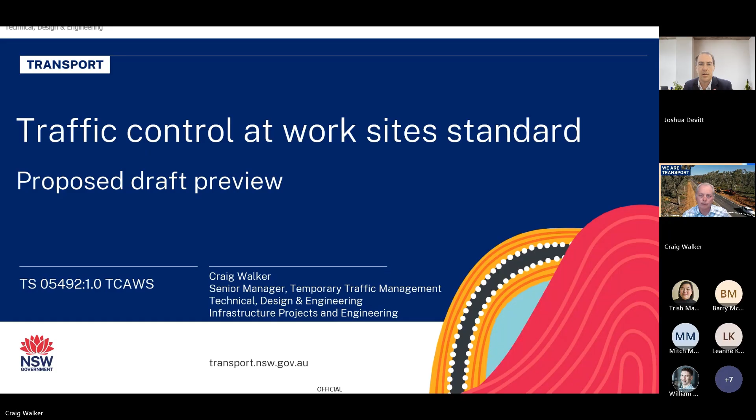We've got quite a good turnout today, which is fantastic to see, particularly given we've got such an important topic to discuss. For those who don't know me, Josh Devitt, I'm the Chief Engineer at IPWEA New South Wales and ACT. We're joined today by Craig Walker from Transport for New South Wales, who's going to run us through the traffic control at worksite standard, or the update to that standard.

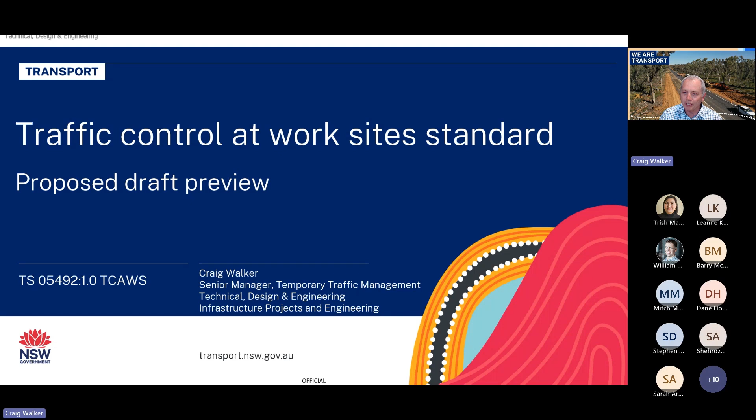Okay, great. Thanks, Joshua, and good afternoon, everyone. It's great to be able to come along and provide you with an update on what's happening with the traffic control at work sites. We've called it a manual for many years, but it's soon to be called a standard. Many of you would know of it as TCAWS, in terms of its actual acronym that is widely used. I've got a fair few slides here to run through, but hopefully we will get through in the time we have.

Really, there's quite a selection of things I want to cover today. You can see there's a variety of higher level things around the scope and changes to the document, a bit about departures and concessions to the document, temporary speed limits. Also wanted to talk about portable traffic control devices, a bit about short-term low-impact work convoys, end-of-queue management, rolling block, special events, oversized vehicle signs, worker fitness for duty, and a bit about where we currently are at with the standard in terms of the next release, and then finally a bit about our web pages. So there's quite a lot to get through there, but I will quite quickly move through the slides, but certainly happy to take any questions via the Q&A or chat function or whatever's available.

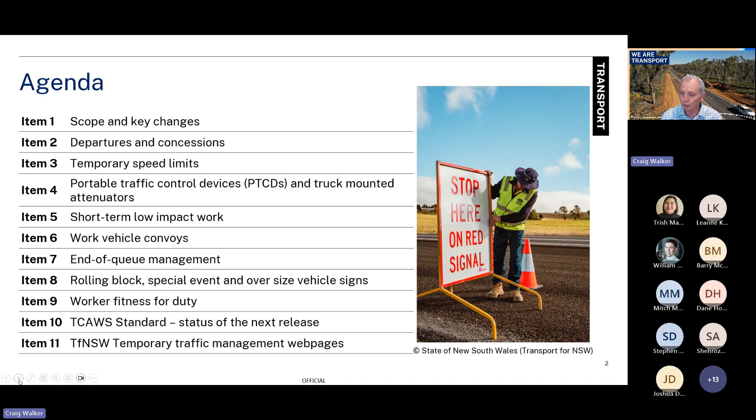In terms of scope and key changes, I suppose the key one to call out here is that we're changing it from TCAWS being a technical manual to being a Transport for New South Wales standard. Largely that's probably just around the way in the format that it's written. It will still have mandatory requirements as the current manual has, it will still have recommended approaches to temporary traffic management, and it will still have options. So it still has the same sort of flavour of different approaches depending on whether it's a mandatory item or otherwise.

But one key change is traditionally the TCAWS manual has only been mandatory for Transport for New South Wales works. With this next release, we'll be requiring it to be applied for all works or any sort of temporary traffic management across New South Wales, regardless of who's doing the actual work. That's obviously a big shift, but that is based on legal advice around Transport's role in providing guidance around the use of regulatory signs and devices. The third point is we're really updating the standard, or TCAWS, to make sure it's aligned with new and current legislation and policies, etc.

I suppose a few more call outs. Ultimately we're aiming for continual improvement here around temporary traffic management, improving safety. As we all know, safety at work sites is paramount, but ultimately safety at a work site is not just about worker safety, it's also about road user safety. When you look at the crash statistics, a large portion of crashes that occur at roadwork sites are actually just road users driving through the work site. So we've got to continually strive to improve safety, both for our workers on site and for the road users driving through those sites.

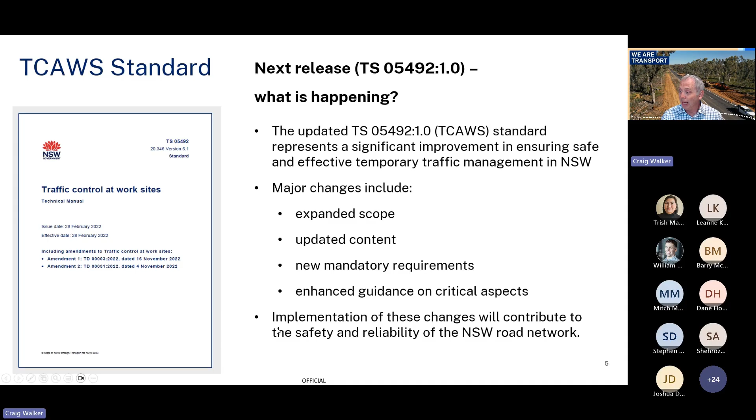Some other changes to call out: we've had to rewrite the manual a lot to align with the transport standards template. Over the last few years, as we've moved from being Roads and Maritime and merged into Transport, we've got a consistent framework now around how our standards must be written. That's the rules I've got to play by when it comes to developing the manual and turning it into a standard. It's got to be in that format and comply with that editorial style guide, so there's some broader parameters there.

The key message is when you get the draft, you'll probably look at it and say, well, gee, they've changed and moved stuff around. It's been rewritten here a lot. A lot of that's to align with this new format. We've certainly updated references and terms and provided more definitions, and found in some cases we've been missing a definition or two, and things like that we've adjusted.

We've improved and provided some more structure around departures from the manual, as in when you can't comply with the standard and you need to do an alternative approach. There's also a cutover point when you need to do a concession to a transport standard, as in TCAWS. We're continually working to harmonise where we can with the Austroads Guide to Temporary Traffic Management and the Australian standard. We've also been incorporating enhanced guidance and requirements based on some research around end-of-queue management in particular, but also around other new devices, and improving our guidance around how we approve those sorts of new signs and innovations.

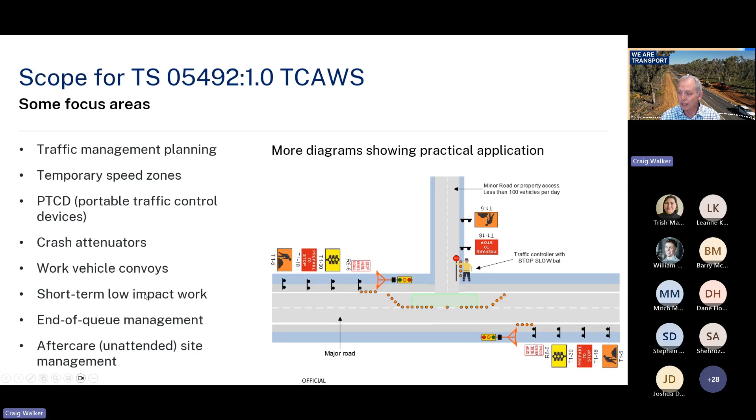In terms of concessions and departures, I won't spend too much time on this, but the key thing to highlight is that the TCAWS manual, and now the next edition standard, has always had a departure process. Certainly the last couple of editions have, which really led practitioners through a risk assessment process to then get an approval to actually do an alternative approach. We want to retain that fairly flexible approach, but there are some situations where some requirements need to go to a higher level approach, which is really this Transport for New South Wales concessions process.

But there's lots of mandatory requirements in TCAWS which might be more work practice based, like how far apart we set up the cones or how far apart the signs are. That can still be managed quite adequately through the existing departure process. So essentially what we're trying to do here is a hybrid approach where we triage the departure based on whether it's low risk or high risk, and obviously the higher risk ones we put an increased focus on.

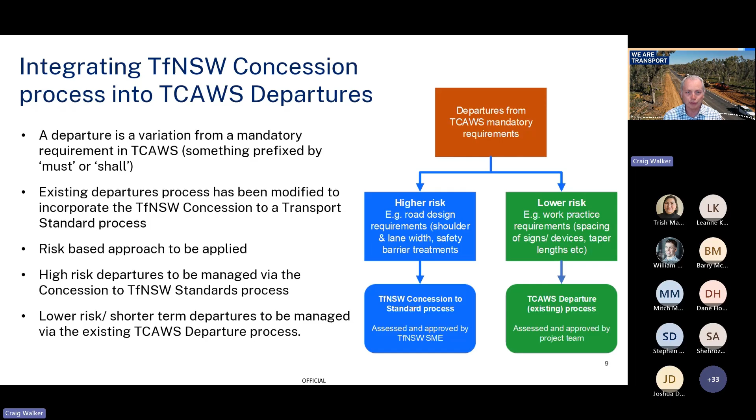Next thing I wanted to cover off a bit on was temporary speed limits. This one's a bit topical because there has been a lot of movement in government around this over the last couple of years, in particular the last 6 months. The New South Wales government's had a priority for some time, dating back to an election commitment around improving practice around the use of temporary speed limits, particularly roadworks speed limits.

Just to unpack that a bit, firstly in terms of context, roadworks speed limits, or more to the point, temporary speed limits, are used for a variety of purposes. Beyond roadworks, we often use them for putting out and managing the risks associated with some sort of traffic hazard, be it pavement damage, a loose surface, or whatever. You can think of other examples.

We also put them out when managing traffic for special events. Could be the mega scale events like the City to Surf in Sydney, but in reality there's lots around New South Wales. There's lots of smaller to medium scale events - I'm thinking of Henty Field Day out in southwestern New South Wales. There's all sorts of events occurring, and often traffic management is required for those.

The third situation is often in some of the transport corridors out of the Sydney environment, where we implement traffic management for holiday traffic, trying to manage those big flows of traffic out of the Sydney metro area. Traditionally, we've used roadwork speed limits for these sorts of situations, and ultimately it just gives the wrong impression and drives community angst about, well, there's no roadwork happening here, why am I being held up. So I think that's setting the scene there.

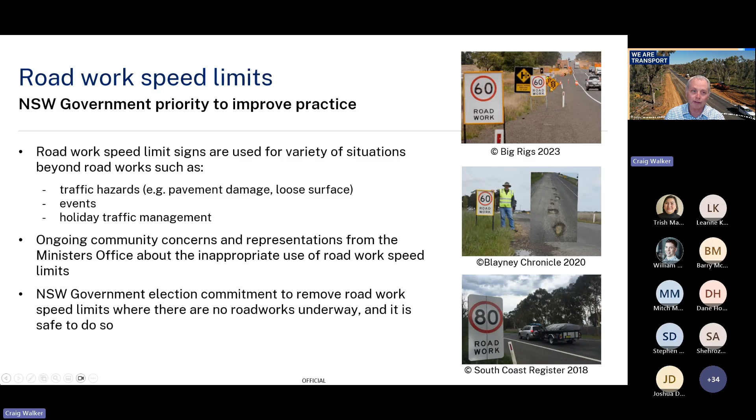In terms of government, they've had ongoing representations around the inappropriate use of speed limits. That led, prior to the current government coming into power, to an election commitment around removing roadworks speed limits when there were no roadworks underway and it's safe to do so. That background led to a bill going through New South Wales Parliament last year, in September, which inserted an additional requirement into the Roads Act that a roads authority must install, maintain and remove roadworks speed limit signs in accordance with the standard published by Transport for New South Wales.

Now, I've paraphrased the actual content in that section a bit, but it also goes on to say that it really extends to other organisations who have been given approval to implement temporary speed limits - civil contractors, traffic management contractors, etc. The actual section of the Roads Act that's been inserted refers to the standard published by Transport, and just to clarify, that is the TCAWS. That will be linked via the Government Gazette back to TCAWS.

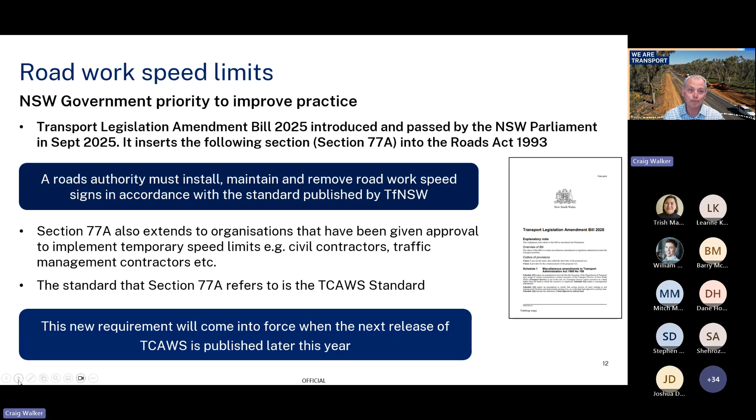These new requirements come into force once this next release of TCAWS is published. But I'm just calling out that there is now this bit of legislation saying if you're going to do a temporary speed limit, you need to comply with the TCAWS standard.

But some more broader aspects around temporary speed limits - they're really only effective if they change driver behaviour. We've probably all driven through work sites or other locations where temporary speed limits have been unrealistic, and they haven't modified driver behaviour to the extent that's been expected or hoped. So it's really about thinking and doing temporary speed limits with a level of nuance, applying a limit that's realistic for the risks involved and managing traffic, as you would in terms of broader traffic management.

You've got to be able to have the road environment really tell that story to the road user of why they need to reduce speed. Otherwise, it's probably not going to work. And as I've said, inappropriate use of temporary speed limits undermines their credibility.

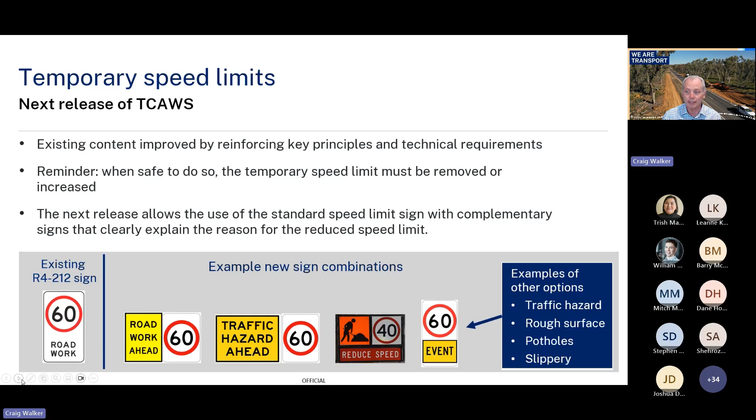If it's damaged pavement and we're not going to be able to repair it for 3 weeks, let's not put a roadwork speed limit out. Let's put a speed limit with a traffic hazard sign that says it as it is. I'll keep moving along now and talk a little bit about portable traffic control devices and truck-mounted attenuators.

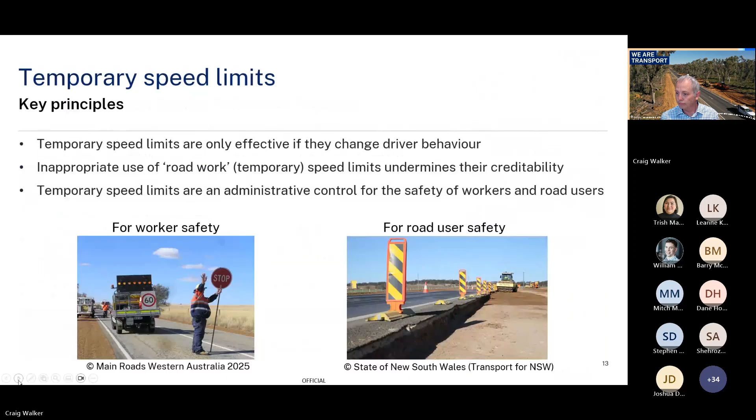Okay, hopefully everyone can see that. Yep. Hopefully it behaves itself a bit better now.

Apologies. Just on portable traffic control devices - I suppose we've had some requirements in the previous edition around the use of portable traffic control devices to drive industry change away from using stop-go bats in higher speed environments. And really, these requirements are more about what we require of transport work sites, but it's probably more of a recommendation for councils and other organisations around where they might go with this. We are certainly tightening up the requirements for transport work sites to remove some of the latitude there.

What I'm getting at is that in some cases we're finding some contractors, delivery partners, etc., are risk assessing out the use of portable devices when it's more appropriate to use them. So we are tightening up the requirements there, and that's really what I'm getting at by being more prescriptive. But there's also some exemptions where we're taking a bit more of a pragmatic approach.

We might say, well, hey, you've got a rural highway with a very small road coming off to the side of it - is there really benefit in putting a portable device on a road that might have 50 vehicles a day on it or something like that? So we're trying to be a bit more nuanced around where we get the most benefit from them as well.

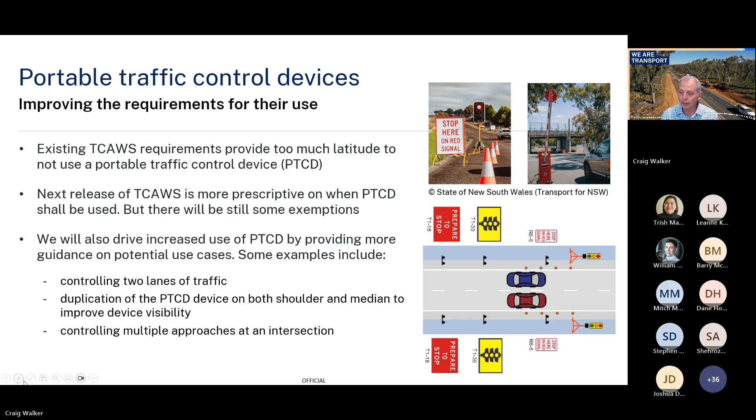There are trailer mounted ones that are available. Certainly I don't put the trailers quite in the same category as a truck. I think probably a trailer is better for a lower speed environment. But there's also these other products.

This Arresta 100 was accepted by ASBAP, the Austroads Safety Barrier Assessment Panel, last year, and has been accepted by Transport. It's an attenuator that you essentially tow out as a trailer and then lower onto the road, and it works on friction rather than the mass of the vehicle so much.

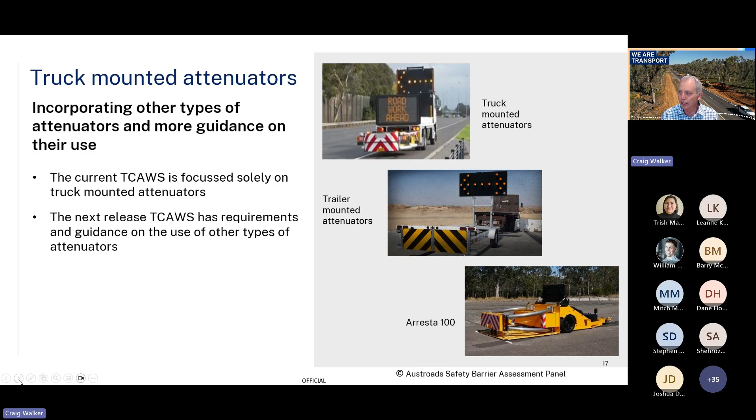So I suppose the trailer ones and this Arresta, these friction-based ones, are opening up potential opportunity around the use of attenuators in environments that traditionally weren't cost effective for a truck mounted attenuator, or in locations where the truck ones aren't available. Obviously these devices on the bottom are also much lower cost, so it helps to give you the option of using them where traditionally a truck one hasn't been used. It's more just to raise some awareness there.

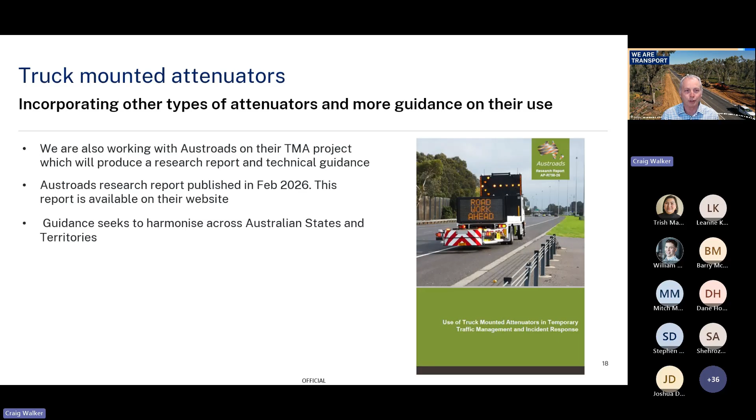The second part of that is the publication of a technical guidance document around the use of TMA devices. That would be an extra part, at this stage my understanding, to the Austroads Guide to Temporary Traffic Management. And that would be more about taking the knowledge and learning from that research report and putting it into practical application.

A bit more about where we're going with the TCAWS standard. We have added some content around short-term low-impact work, and largely that was already in the manual, but what we're doing is aligning with the terminology used in Austroads around short-term low-impact work, endeavouring to align TCAWS with the similar approach that the Austroads Guide has.

So I suppose some examples of this short-term low-impact work are things like site investigation, geotech, survey, etc. Obviously roadside maintenance, litter collection, all those very short-term activities where it might be more appropriate to use a frequently changing work site or intermittent type work rather than putting a normal static work site in.

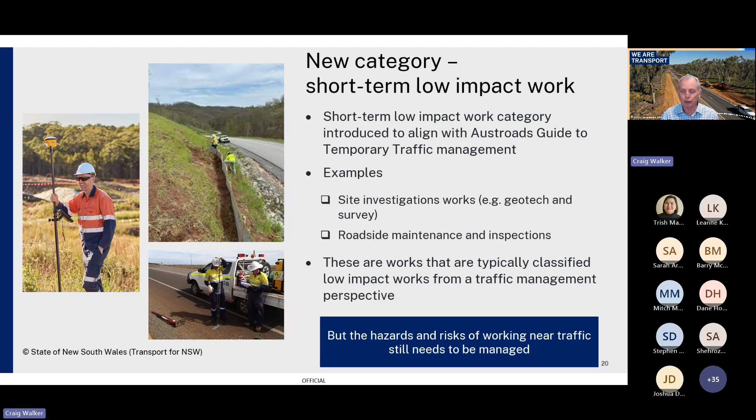I suppose this is an example. I'm not sure if my little animation will work. My team developed this, but you might notice it's sort of the animation.

So really this is taking what would traditionally be used in terms of an intermittent work approach, where you'd have a spotter and a worker looking for gaps in traffic and then moving out. Let's say it's a survey scenario where they just need to take a few shots along the centre line to pick up the centre line, or where they'd have a lookout person and the actual worker would do intermittent type work.

This example, which was in the next release, is about saying, well, that's okay, but maybe there's also scope to do something between just pure intermittent work where you don't have any controls at all, just flashing lights, and also a static site. So this has got the addition of a shadow vehicle and some advanced warning signage. Again, by reducing the speed down to 60, it gives them more opportunity around the actual gaps they're using, and obviously a bit more assurance around how they use those gaps and work near traffic.

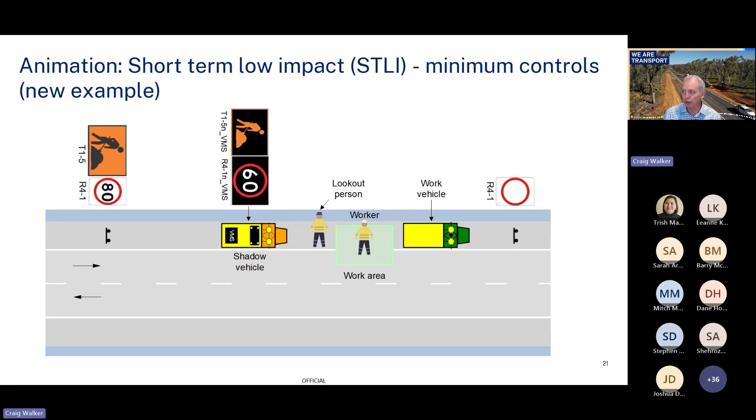So there's obviously much more content around that, but just giving you a bit of a flavour.

Work vehicle convoys. At the moment, the current TCAWS manual really takes a one-size-fits-all approach to convoys. This is an area we've identified that we need to provide much more guidance on, because if you're even doing mobile work or short-term low impact work where you're moving from different locations along, say, a motorway, that's very different.

That's very different to an urban road like Victoria Road, for example, and obviously very different to what you see behind me, which is the Newell Highway in Western New South Wales. And of course, there's other roads and council roads that are obviously much lower traffic volume as well.

So what we're aiming to do with this piece is to really give more guidance around what sort of speed environment and traffic conditions you have, and that will influence what the composition of your actual convoy is. Because having that sort of convoy you can see on the top of the screen there for doing verge mowing along a regional road in Western New South Wales, or even some transport roads, is unrealistic. Even the Newell Highway, I think that it would be too much. But obviously in a motorway environment, it would be a different situation.

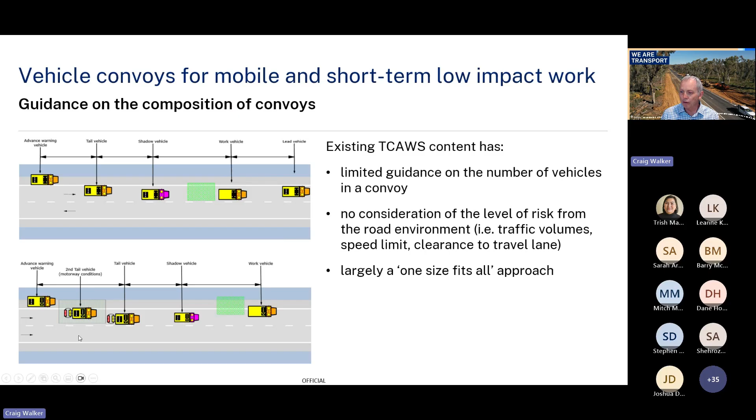So what we've got in the next manual, we've really tried to break it out, and this is just a bit of an example, really about providing guidance on the minimum convoy for different types of scenarios. So obviously different road environments, but also whether you're working in the traffic lane, whether you're on the road shoulder, or outside the traffic lane and shoulder, in other words well back on the verge.

This table is a sample of what's in the next release, particularly for outside the traffic lane, but it's really trying to categorise based on the volume of vehicles per day, and then also how far away you are from the travel lane, and obviously the speed limit, to give a categorisation of what sort of convoy you might need.

So less than 1,500 and greater than or at least 1.5 - if it's 60 or less, then you don't really need a convoy. Whereas getting down here to more than 10,000, greater than 90 kilometres an hour, we're into category D, which is a shadow vehicle, tail vehicle, advanced warning vehicle. So I think you can probably see that what we're trying to do is graduate the number of vehicles in a convoy based on the potential level of risk, considering traffic volume, speed, offset from the travel lane, etc.

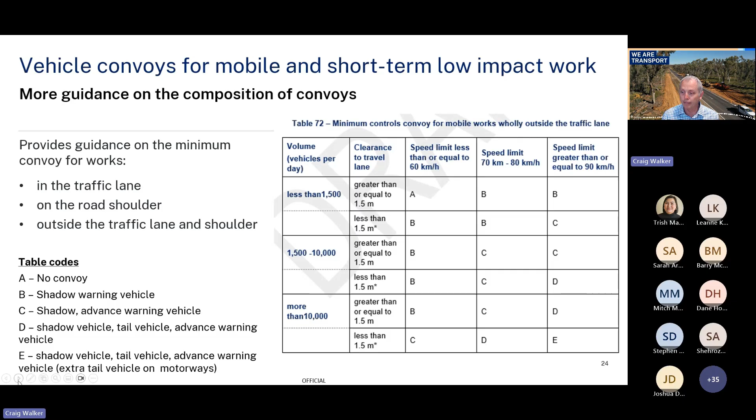End of queue management - I'll touch on this a bit. This is a fairly important piece of work because we have been doing a lot of research around this, jointly funded with Deakin University and iMove CRC, a work zone end of queue management study that's been done over the last two to three years.

It really wrapped up midway through last year. It was all about reducing the incidence of end of queue crashes. Initially, when this research was started, it was probably about a third of crashes at roadwork zones were end of queue related. Over time, that's now down to probably about a quarter, but there's still a sizable number of end of queue related crashes at roadwork sites.

So we're really conscious of providing more guidance and more practical measures that can lessen that risk. You can see on the right-hand side the Deakin report, the research report that was published - about a 450-page long document. It really went into trialling a whole series of different treatment options for managing the end of queue risk. I think we ended up trialling about 25 to 30 different treatment options, aimed at categorising those that were most effective.

Really what we've been doing since then is turning that research report into practical guidance in this TCAWS standard, so that a practitioner can pick it up and say, well, I'm in this sort of road environment, what should I do, I see my risk as this, what measures should I put in place?

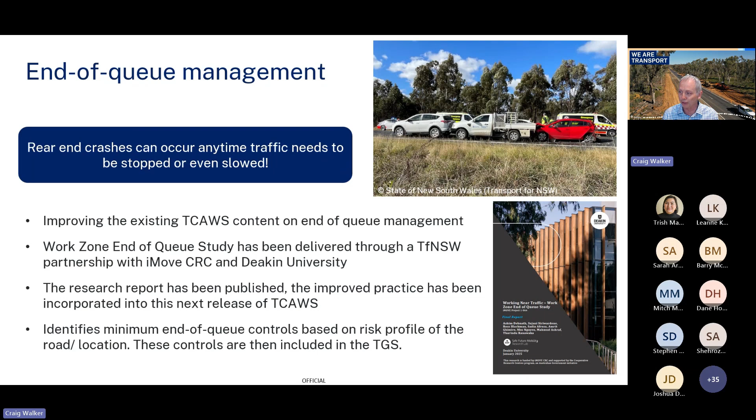A couple of examples of the different treatment options - this is an example of a level 1, a lower risk option, maybe the baseline for a rural highway or something like that. You can see we've duplicated the prepare to stop signs, and provided duplicated queued traffic ahead signs with the prepare to stop. You'd be surprised, in some cases we don't get this in terms of current practice of duplication on both sides of the road, so we are pushing this as the baseline treatment for a transport worksite particularly.

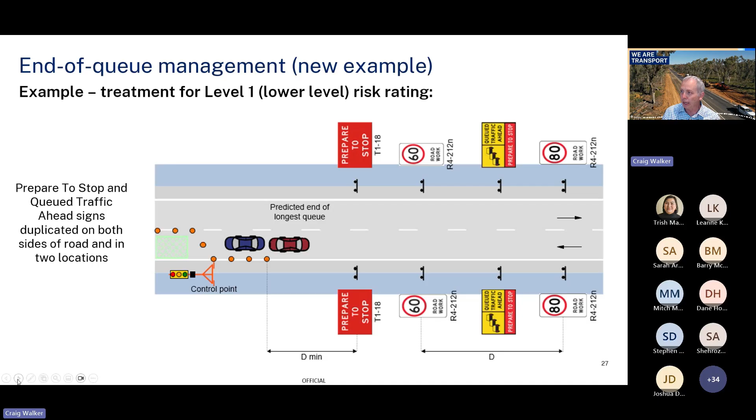A level 2 treatment is a bit more advanced - similar duplication of the prepare to stop signs, but now with a similar queue warning prepare to stop sign, with the addition of flashing lights. Some people might say, does flashing lights really make a difference? Interestingly, out of all the different treatments trialled, this sign came up as one of the most effective, just as a sign with a couple of flashing lights rather than anything particularly innovative in terms of technology. Hopefully those examples give you an idea of the different levels.

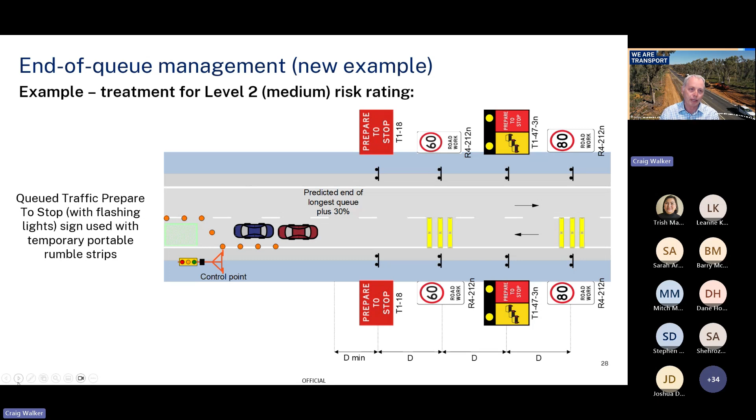And of course, in a motorway, a higher risk environment, we have more measures again, but it's really about layering on some extra queue management measures.

Moving on to rolling blocks and special event signs - let me make sure I haven't jumped a slide there, sorry. Special events, and I suppose this is a bit of a grab bag of a few different things we just wanted to highlight.

Certainly we've added content around the use of rolling blocks, and you can see from that animation that a rolling block is about keeping the traffic behind escort vehicles. In this example, they're using two truck-mounted attenuators to either slow or completely stop the traffic to allow a work activity to occur up in advance of the rolling block. This may not be so relevant for lower volume roads, but certainly in some higher volume situations it can be more effective than putting in formal traffic control.

It was used recently for a bridge girder lift up in the Hexham M1 to Raymond Terrace project, rather than putting in traffic control and having to stop traffic in a single lane, and also in a very challenging location.

They used a rolling block each time they needed to stop traffic to do a girder lift, and they had exceptional productivity through using this approach, but also far better safety outcomes because they weren't putting traffic controllers on the roadside in very challenging, difficult sort of locations at night in what would you call a low safety scenario. Ultimately TCAWS didn't have content around this. It should have had it, but we're putting that in now.

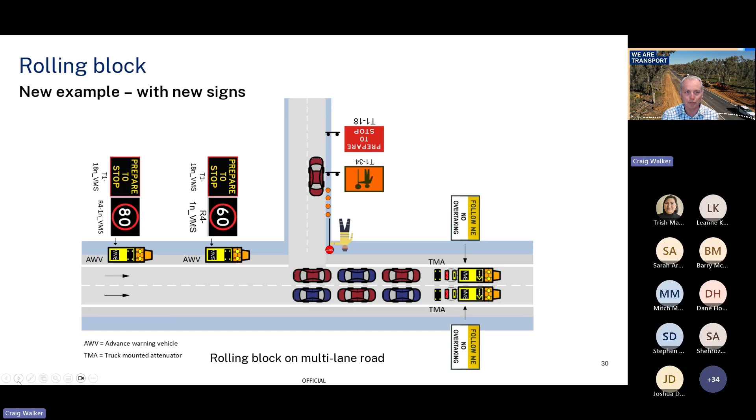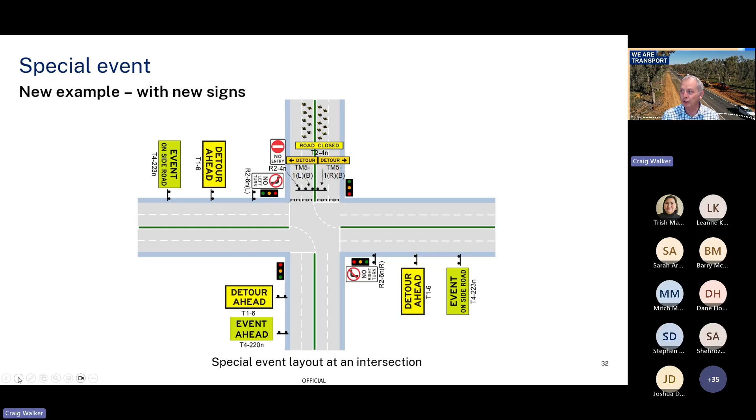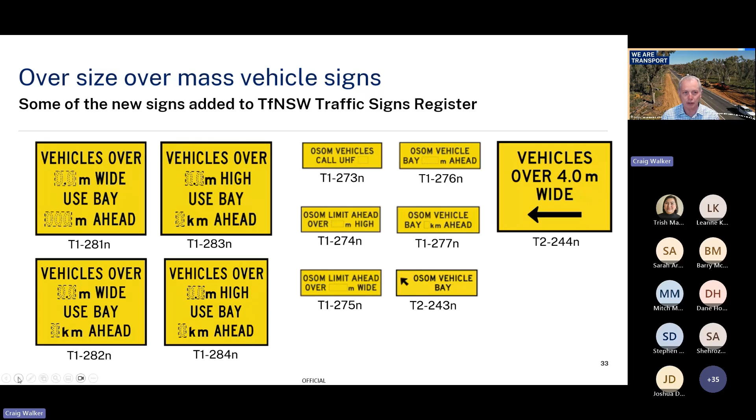We've also been adding lots more signs for oversize, over mass vehicles. Again, this provides some consistent sign options for managing those sorts of vehicles at work sites.

Fitness for duty is an important topic we've added more content on in this next release, around ensuring workers are fit for duty, and that those requirements are clearly communicated, even in the TCAWS standard as well as other places. The key call-out is that all workers shall be fit for duty for the entire duration of their shift, including travel to and from the work site.

One concerning thing is that the traffic control industry can sometimes send people extended distances to work at a location, and we need to be considering not only the time they're on site, but also the potential for fatigue risk as they're travelling to, but particularly from, a shift. If they're travelling a couple of hours each way to do an 8-hour shift, that becomes very concerning around fatigue risk. So we've put a lot more focus on that in this next release.

We've also really called out the transport policy around drug and alcohol use. When we call out the fatigue management and drug and alcohol policies, that's mandatory for transport works. Recognising the manual has to be applied across all works in New South Wales, there are some elements that call out and say, for transport projects, you must comply with this policy and this policy. But if you're a council and want to apply that same approach, that's your discretion to do as well.

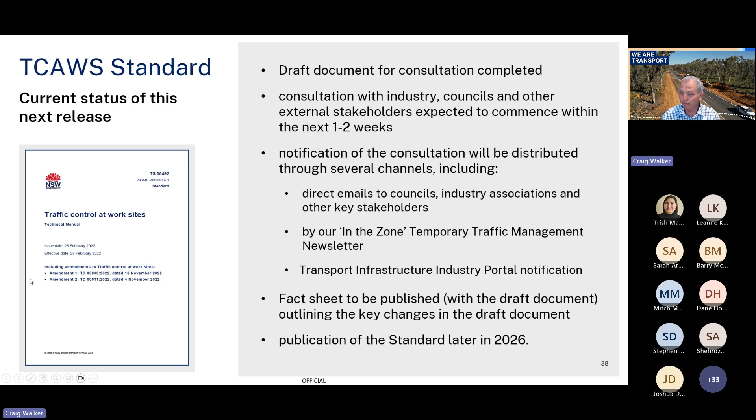We've got what we'd call a temporary traffic management homepage - that's really more of a landing page that tells a bit about our role and responsibilities in transport, and probably that more administrative aspect of what we do. But then it really breaks into a number of different web pages - we've got one focused around traffic control at work sites.

We've got the technical manual at the moment, soon to be renamed standard, which talks about the TCAWS and technical directions published in the past, some fact sheets around that, and some FAQs. Alongside that, we have a page that's all about temporary traffic management templates, checklists and other example documents.

This has been an intentional move of taking templates and checklists out of TCAWS and publishing them separately on a web page, which has allowed us to publish them in Word format so you can pick them up and modify them for your own circumstances, and develop them further if you're working in a council environment. It also gives us the opportunity to publish updates to those templates and different scale versions independently of the TCAWS process, which is much more governance driven in transport than me just publishing something on a web page.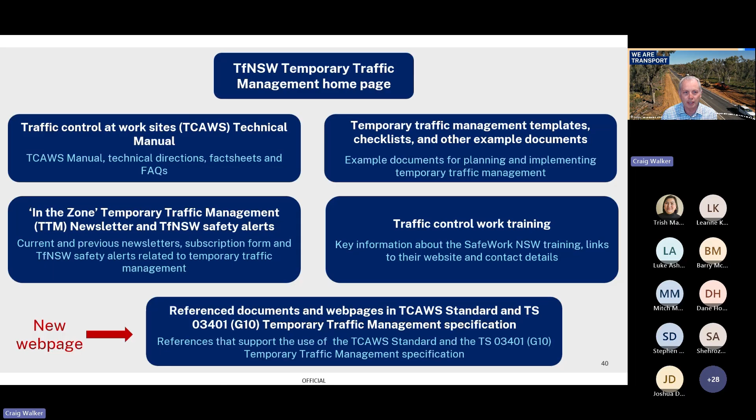There's a general requirement to avoid putting lots of links in our standards, and that comes from our standards team. So this web page is really a way of giving you a resource point to find all these different links and resources without embedding them into TCAWS itself. There's extra stuff around things like different data platforms that Transport has around traffic volumes, bus movements, and all sorts of other data sources that can be helpful. It obviously supports both the TCAWS standard as well as our G10 traffic management specification.

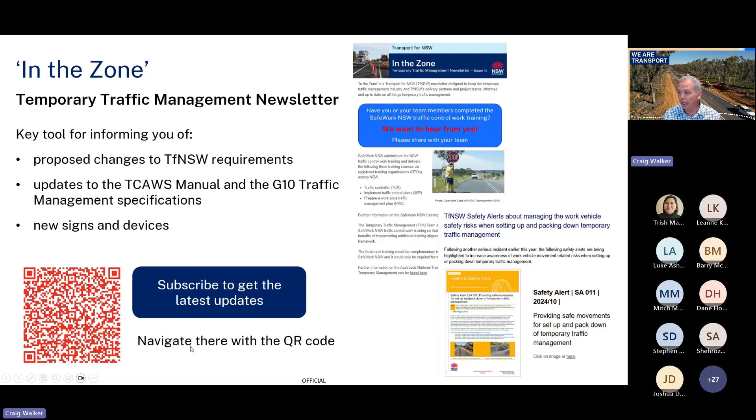It's also about communicating when we have updated things, and when new versions come out with new signs and devices. There's a QR code there as well.